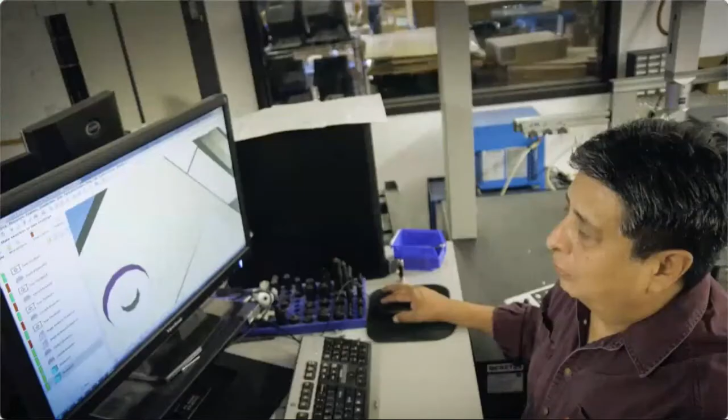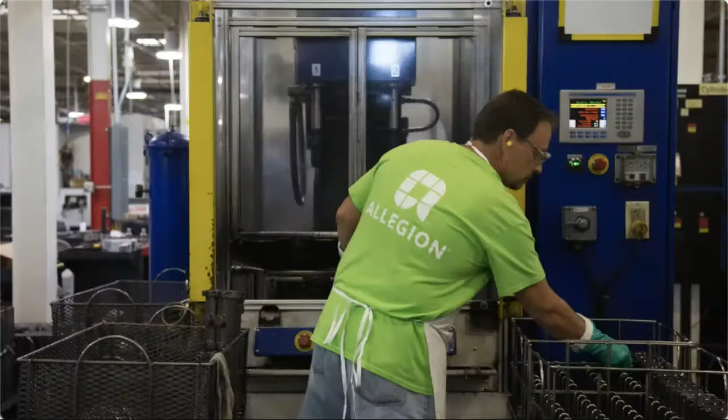At Allegion, we believe manufacturing is both a vibrant and essential industry. With many new trends impacting what we do every day, from robotics to the Internet of Things and more, there's no doubt that the creators of tomorrow have important roles to fill in pioneering safety and security at Allegion, both now and in the future. Guided by a shared vision of seamless access and a safer world, our employees are innovators, building products and solutions that create peace of mind.

As a global manufacturer with more than 30 brands in our portfolio, we invest in tools, technology, and our employees. Because of this, we have a healthy U.S. presence where those employees build mechanical and electronic locks, emergency exit devices, door closers, steel frames, and many other security solutions that help keep people safe at work, at home, in our community, and on the move. Let's take a look at some of our essential facilities and incredible jobs.

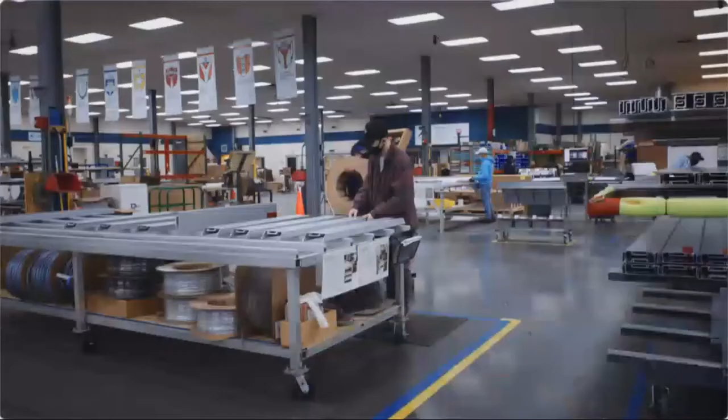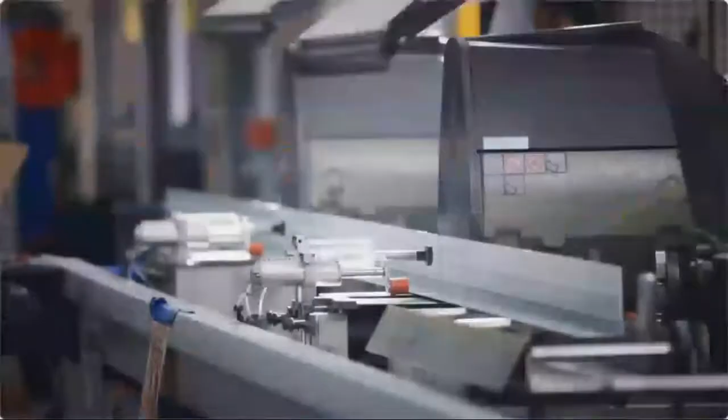Near Seattle, in Everett, Washington, Allegion's AD Systems solutions are produced in a 50,000 square foot facility. Since 2009, AD Systems has manufactured high-quality door systems for customers across healthcare, hospitality, commercial office, and education environments. Through a strong commitment to innovation and positive relationships with architects and designers, our experts in Everett quickly respond to the requests for custom work, ultimately building sliding doors and interior storefront assemblies for projects throughout the United States and abroad that can meet a variety of aesthetic, privacy, and safety needs.

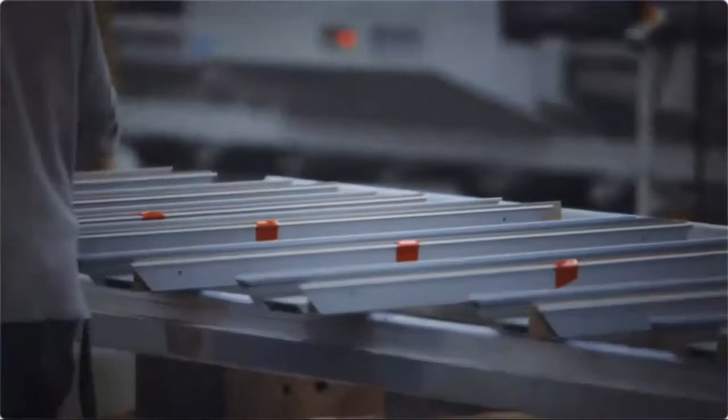In fact, our AD Systems employees manufacture doors that can meet the strict health requirements of clinics and medical offices, as well as offer the energy-efficient and touch-free automated accessibility of the future.

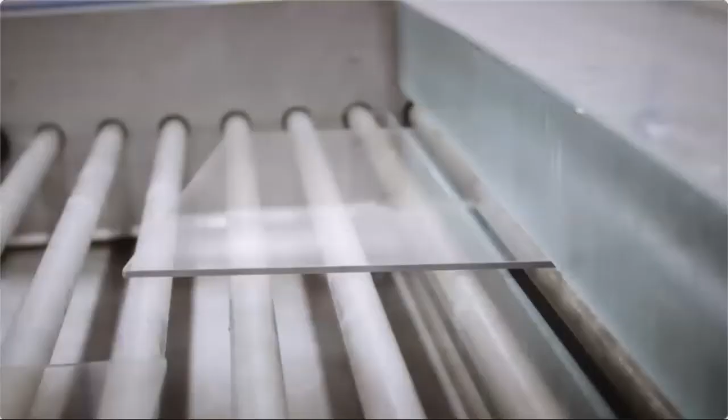In Snoqualmie, Washington, also located near Seattle, Allegion produces Technical Glass Products, or TGP, solutions. Since 1980, TGP has been supplying specialized glazing materials and systems for commercial and institutional buildings around the world. The brand is committed to helping solve challenges faced by architects, general contractors, and glaziers through its services and two product lines: fire-rated glass and framing, and specialty architectural glazing. You'll find these solutions at airports, schools, libraries, hospitals, and museums, among other places.

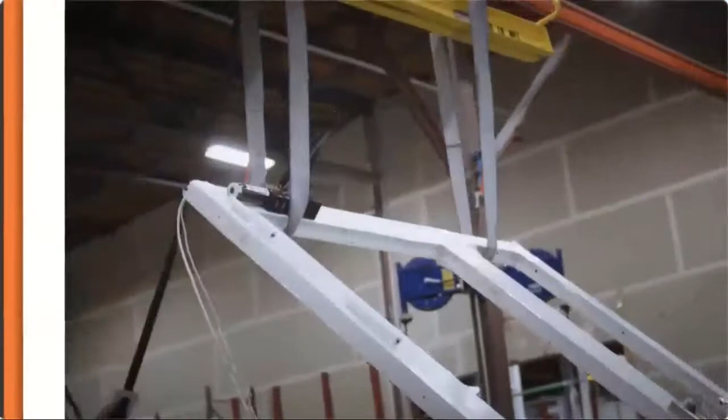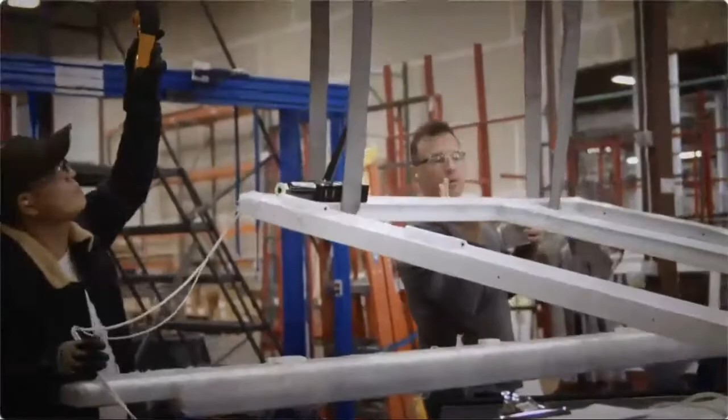TGP has exclusive agency relationships with Nippon Electric Glass, NEG, Pilkington, and RP Technik to distribute certain glass and framing product lines in North America and the Middle East. Our jobs in Snoqualmie range from assembly, with roles in fabrication, welding, and powder coating, to engineering, sales, and more.

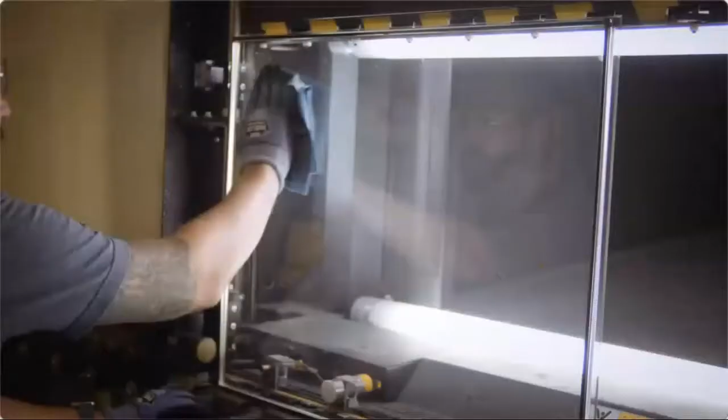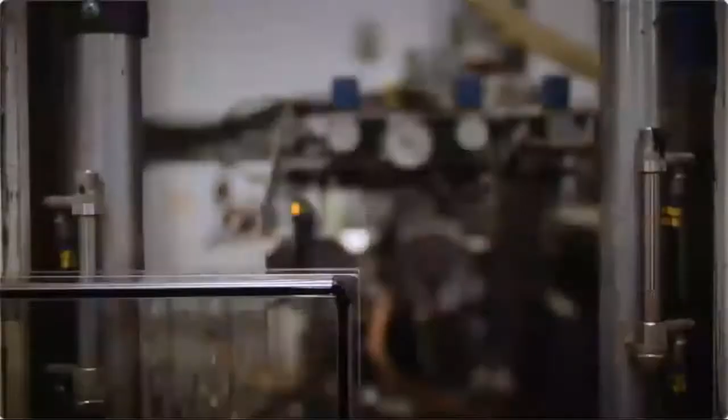TGP solutions are additionally manufactured in Perrysburg, Ohio, where our talented experts cut and package fire-rated glass to be paired with frames built in Snoqualmie or sold separately as loose glass for other customized applications. There, our state-of-the-art facility boasts nearly 70,000 square feet of manufacturing space, with opportunities to operate robotic equipment, as well as automated machines that, on average, process sheets of glass that weigh more than 800 pounds.

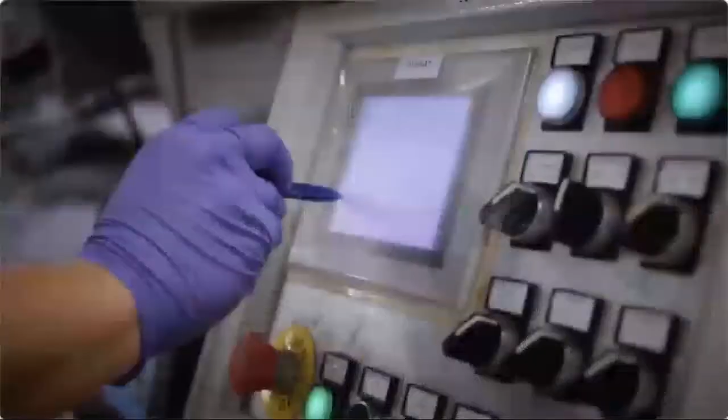The Perrysburg facility has two main product lines: Pyrostop glass and FireLite glass, and the local team averages cutting more than 6,000 pieces of glass per month.

Our Steelcraft brand boasts 2 manufacturing locations, a West Coast service and manufacturing center just east of Los Angeles in Chino, California, where we assemble and produce custom hollow metal doors and frames, and our main plant in Blue Ash, Ohio, near Cincinnati. While we proudly produce high-quality steel doors and frames at both facilities, our long-standing manufacturing history is rooted in Blue Ash.

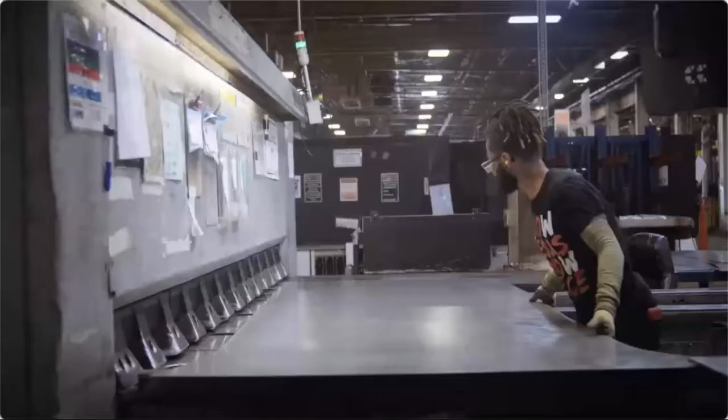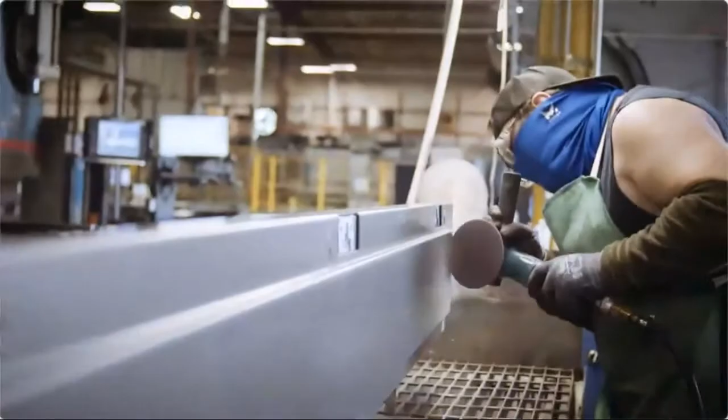Located there for more than 75 years, a visit to our operations showcases talented employees with expertise in materials handling, welding, laser operating, and fabrication, creating doors intended to withstand fires as well as tornado and hurricane winds. Our production process starts with order entry, configuration, scheduling, and programming, and then moves to manufacturing our doors and frames from beginning to end, with finish on the paint line before shipping.

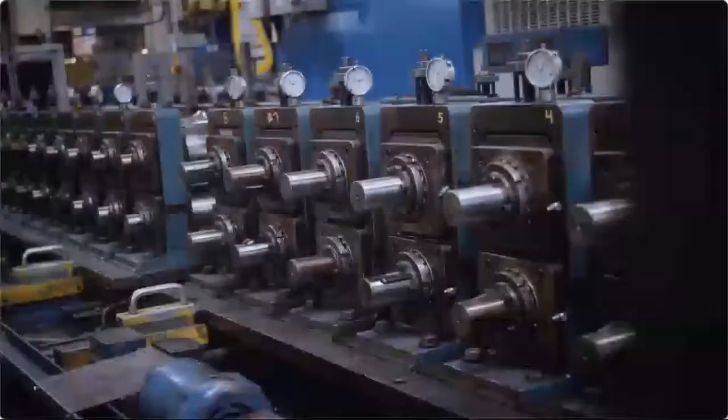From there, they go everywhere. You'll find these doors and frames around the world too, at medical centers, schools, and commercial offices. Some of our solutions can be seen in popular gathering places too, like the Superdome in New Orleans, the State Convention Center in Washington, and Iowa State's Sports Performance Center. You'll find our products at Ohio University, the University of Michigan, and the University of Kansas too.

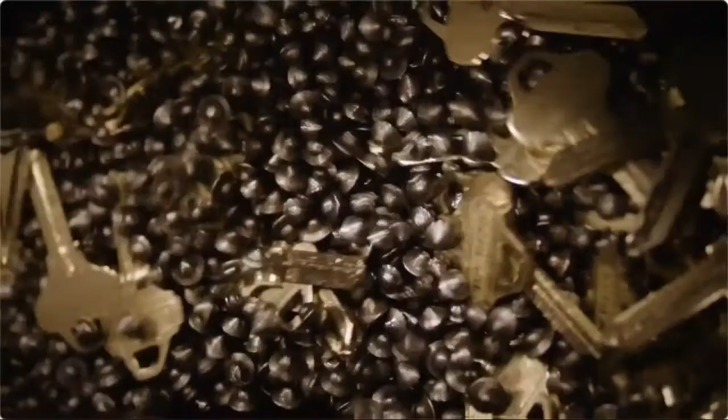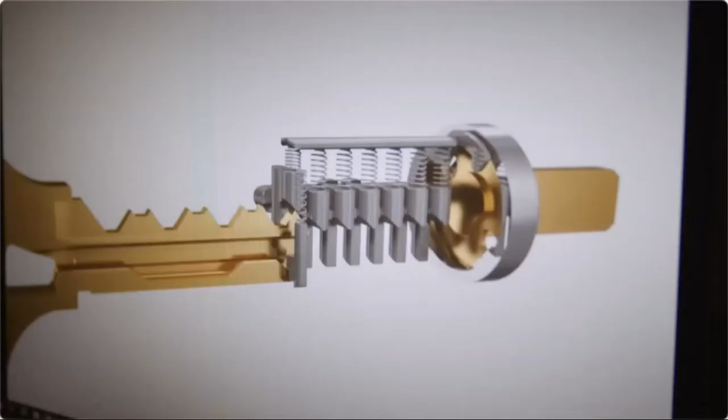In Security, Colorado, close to Colorado Springs, we produce keys, lock cylinders, and mechanical locks, as well as high-security credentials and biometric products, all for commercial buildings. We've operated there for more than 40 years, and our talented employees process over 100,000 parts per day and configure and test a wide array of high-security products that are distributed to customers across the globe. The site is comprised of critical roles that include engineering, fabrication, assembly, testing, distribution, and supply chain management. Our associates use innovative tools like 3D printing, high-speed precision machining, and computer-aided design programs.

We're especially proud to manufacture the Schlage brand of security solutions that provide seamless access at office buildings, universities, medical centers, and other vital places through mobile credentials.

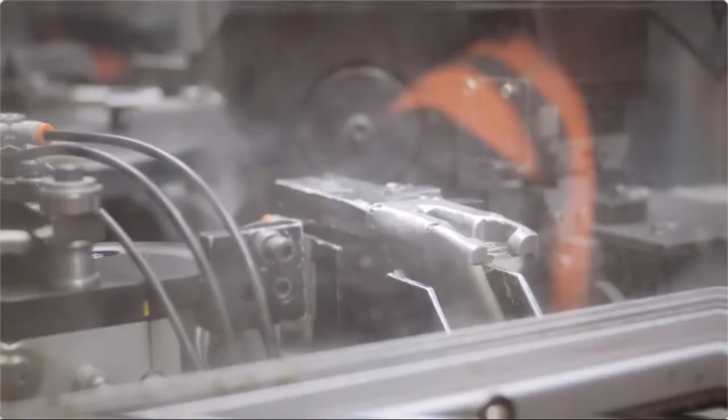Our Olathe operations has produced mechanical lock cylinders and keys for more than 40 years in the Johnson County area. Located just outside of Kansas City, our facility includes a nearly 300,000 square foot warehouse and employees who also work in distribution, customer care, and sales. In fact, any Schlage residential lock that you see at your local hardware store, like Lowe's or Home Depot, has been supplied through our Olathe operations.

That means if you live in the United States and have a Schlage door lock on your home, it passed through our facility here. We fulfill approximately 300 orders per day and ship nearly $1 million worth of product daily from this facility. With core competencies in assembly as well as shipping and receiving, there are many incredible opportunities to play a role in delivering Allegion's vision of seamless access and a safer world.

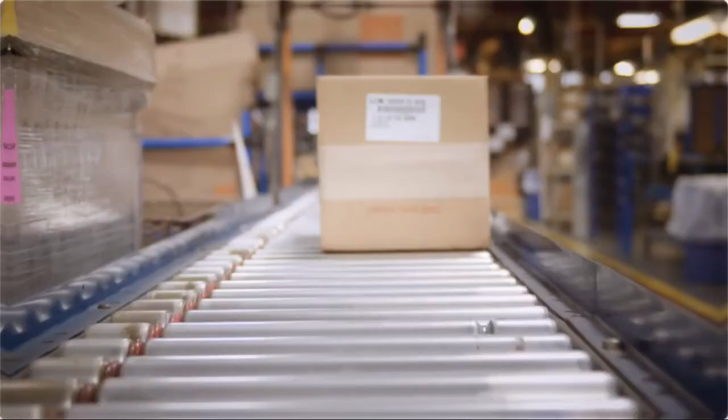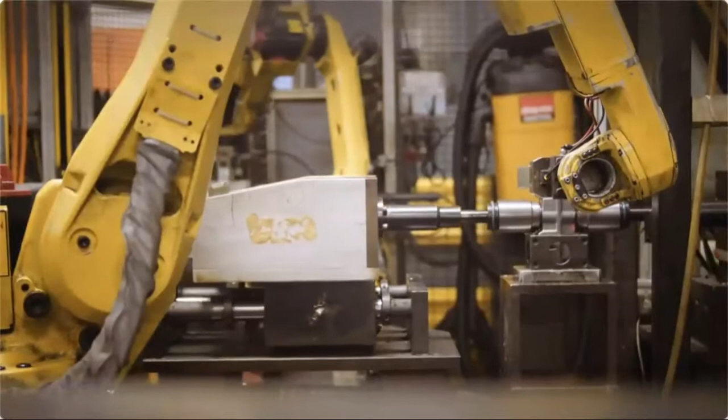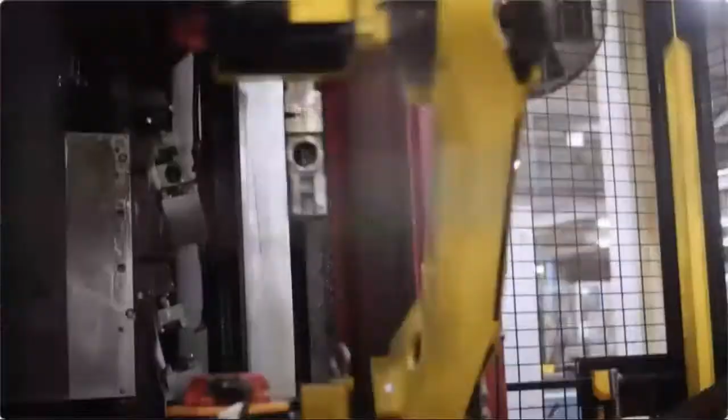Allegion also has a strong legacy in Illinois, where we have manufactured LCN door closers at our Princeton facility on Railroad Avenue for more than 70 years. Here we've invested in state-of-the-art equipment, from CNC machines that can be programmed to run multiple processes for manufacturing multiple product lines at the same time, to cobots that work next to our people in an assembly line, driving extra flexibility and efficiency. Using this equipment requires problem solving and troubleshooting, programming, digitization, and automation skills.

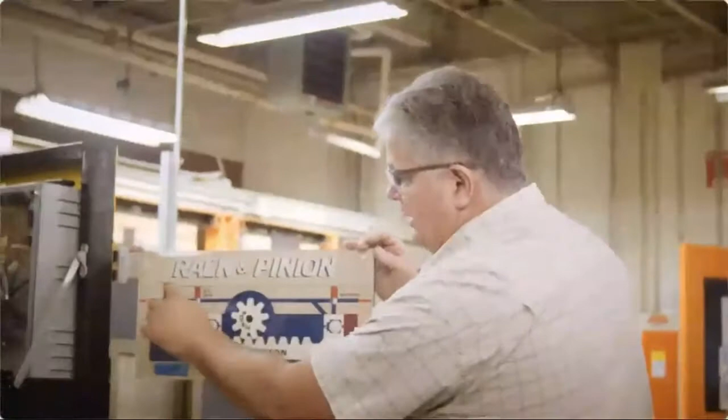You'll also find lab technicians that specialize in product testing, tool makers, and maintenance teams, all of whom play a vital role in taking our security solutions from start to finish. LCN products can be found in many high-traffic facilities such as schools, hospitals, government and correctional buildings around the world. Our creators produce 35 different series of closers and door hardware to choose from, products that have 15 to 20 years of operating life.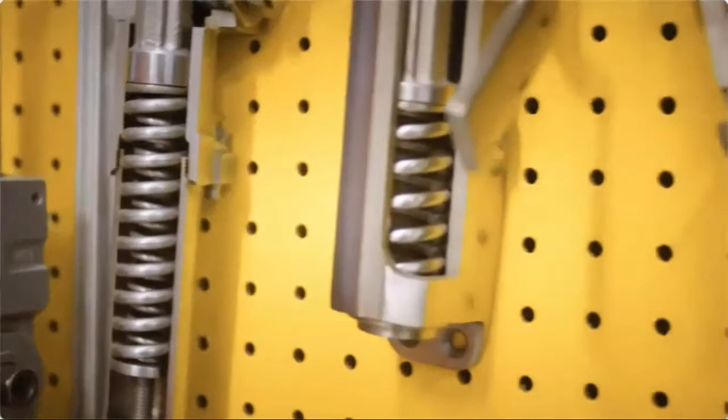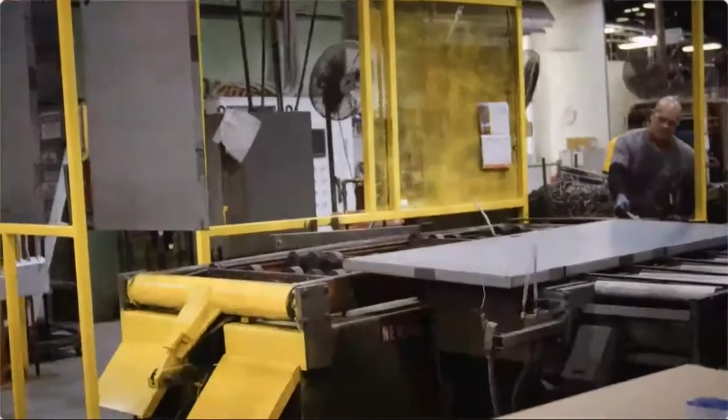Our Republic brand proudly operates in McKenzie, Tennessee, sitting in the northwest region of the state at the tri-point of Carroll, Henry, and Weakley counties. We've built high-quality hollow metal doors and frames there for more than 40 years, and today our talented creators produce 300,000 frames and 80,000 doors annually.

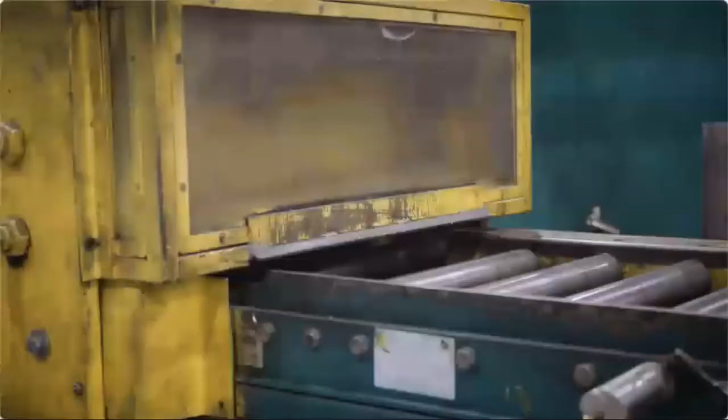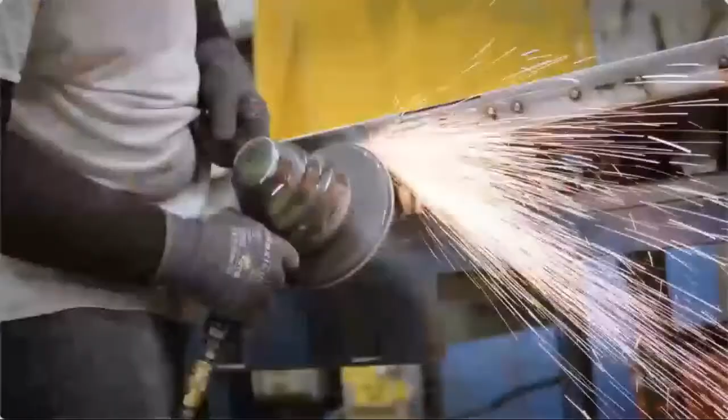You'll see our solutions everywhere from national museums in Washington, D.C. to corporate data centers on the West Coast. Our people specialize in customizing products to meet customers' exact needs. For instance, our talented employees grind down metal to prepare for a seamless door edge application, many times required for schools, hospitals, and commercial kitchens. And while our employees focus on customer needs, they've also innovated many of the ways we work to improve safety, ergonomics, quality, and efficiency.

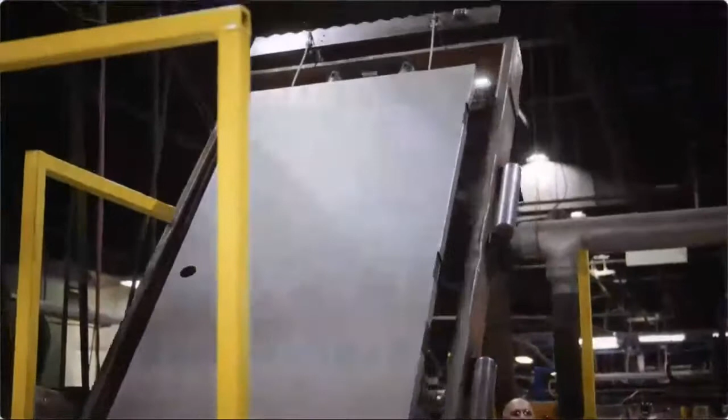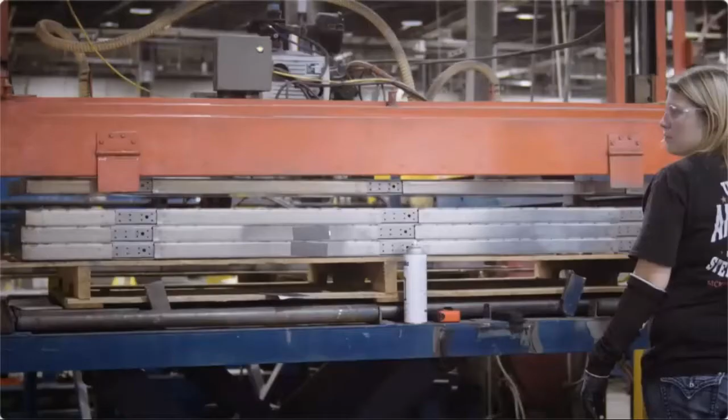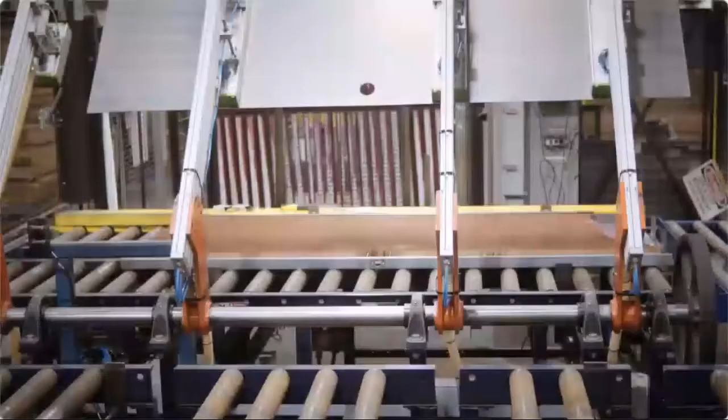Because of that, you'll see automated processes and conveyors in McKenzie that transfer our doors and frames through different phases of production. But our people make the difference, running control stations, cutting and forming systems, paint lines, and commercial drying ovens, among other important equipment. And because we work with steel, precision welding drives our solutions to be strong and durable for years of continuous service.

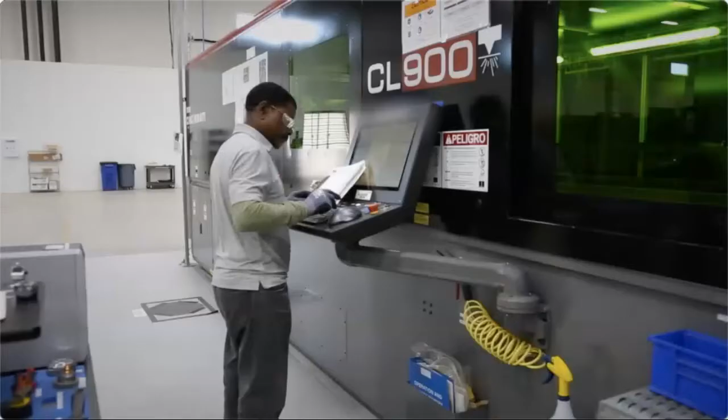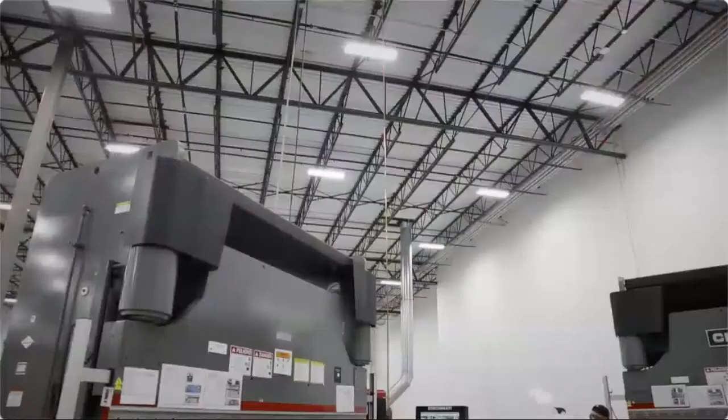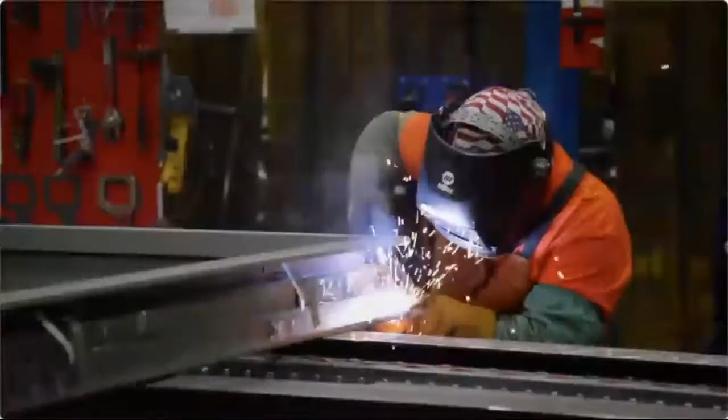Yet another Allegion facility, located in Irving, Texas, features state-of-the-art custom manufacturing for our Republic hollow metal doors and frames. There, our experts use laser technology to make high-precision cuts of metal sheets that provide speed and flexibility, as well as minimal waste and greater efficiency for projects. Our operators additionally use brake presses to safely and accurately form frames, welding stations to match specific order requirements, and paint stations to put on the finishing touches.

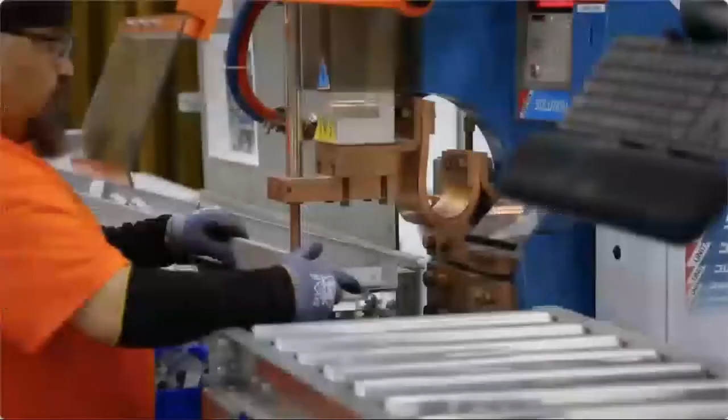Unique skills utilized throughout these production processes highlight the level of talent our experts possess, and that are needed in today's modern world of manufacturing.

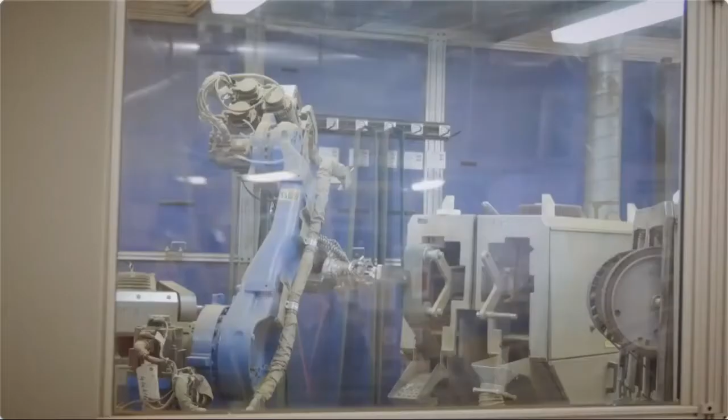Rounding out our U.S. manufacturing footprint, we have two production facilities in Indianapolis, Indiana, located right down the street from each other, operating on Tobey Drive for more than 30 years and in the state for more than 100 years.

We build Von Duprin and Falcon exit devices, as well as Glynn Johnson, Ives, and Zero International door hardware there. We're known for inventing the emergency exit device, as well as all of the customization we can provide for those life-saving devices today, which you'll see in nearly every public building, be it a government facility, a grocery store, a restaurant, a movie theater, a place of worship, a university, or otherwise.

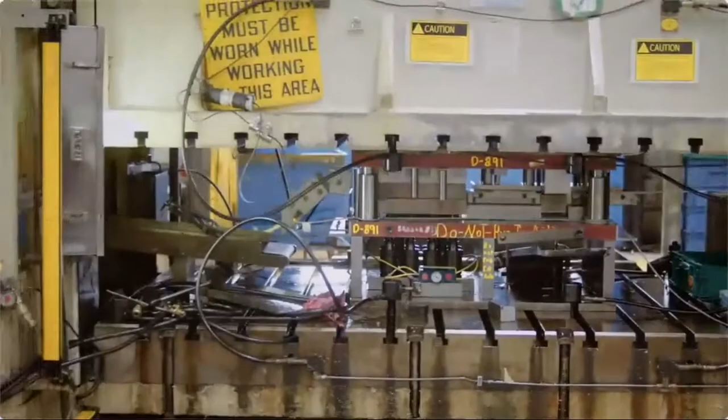In fact, we produce more than 100,000 unique configurations in an average year. On any given day, we fulfill around 700 orders, requiring a cross-trained and flexible workforce with competencies in stamping, CNC machining, powder coating, plating, laser cutting, and etching.

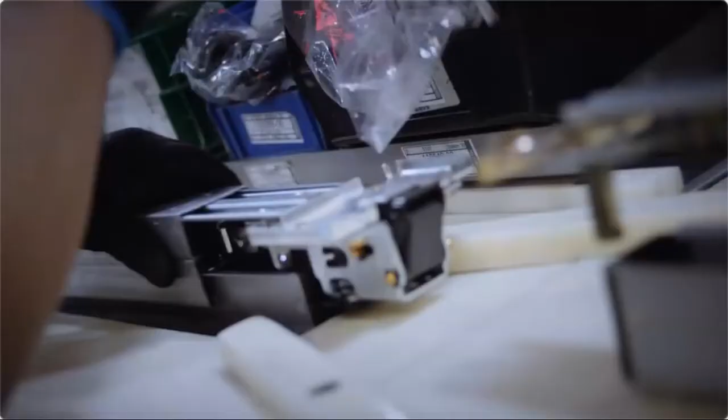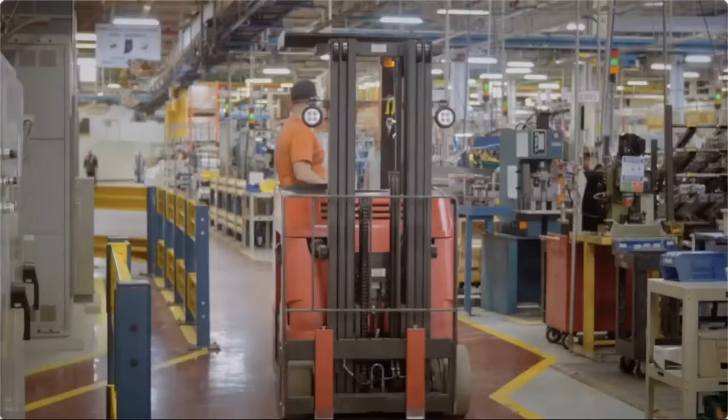Our main line has a state-of-the-art vision system with 3D work instructions. It's so sophisticated that it detects errors and stops the line if a device is not built exactly as ordered. Our people play a critical role, through problem solving, in keeping our customers safe whenever and wherever our solutions are used. There's no doubt that Allegion employees are innovators, creating new and better ways to keep people safe.

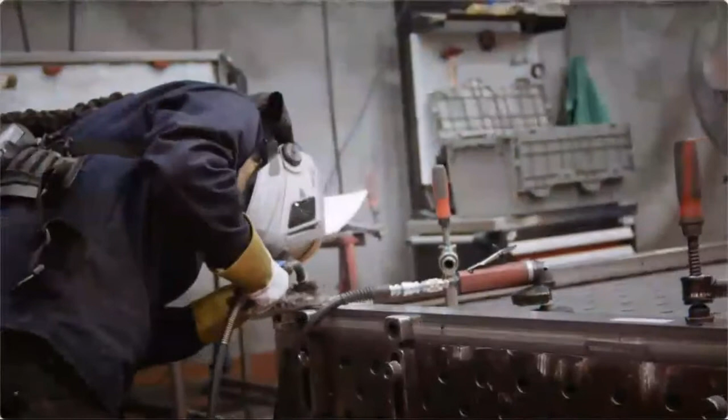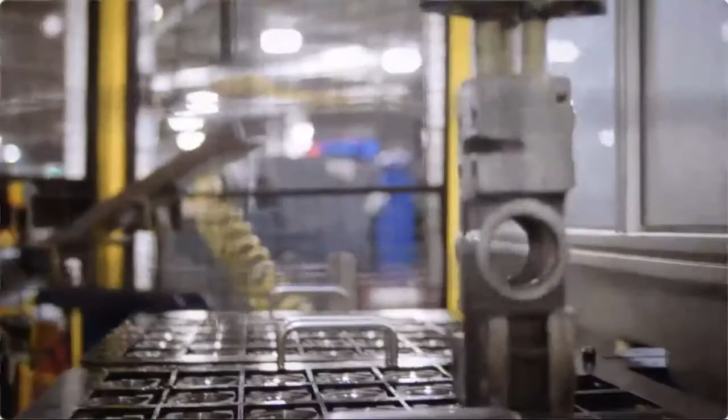The manufacturing jobs found at our U.S. and global sites today are centered on employee empowerment, engagement, and problem solving. From assembly, engineering, IT, materials management, distribution and logistics, robotics, environmental, health and safety, tool making, and more, the career paths are vibrant and valuable at Allegion, and our work has never been more important.

Welcome. We are so excited to have you with us for our 2021 Virtual Manufacturing Day. My name is Chris Dybeck. I am the plant manager at the Allegion facility in Princeton. Each year we hold this event in October to celebrate the amazing opportunities in manufacturing, and we hope to inspire some of you to pursue a career in this great industry.

There are many vibrant and valuable jobs. Manufacturing, as we've definitely seen throughout this global pandemic, is essential. Think about it: if something isn't grown, it's made. And at Allegion, our work matters. Allegion has continued operating throughout the COVID-19 pandemic to continue producing our essential products, which provide safety and security at medical centers and hospitals, among many other places.

Of course, our event this year is virtual to help protect your health and safety, as well as the health and safety of our 300 local people. As a business that's been located here for more than 70 years, health and safety is our top priority.

At Allegion, we invest in our employees and our facilities. If you were in person with us for a tour today, you'd see many updates to help protect our people, like physical barriers, temp screenings, self-assessments, and mask use. And even though you aren't here in person, we're going to spend our time together today showing you everything we can about who we are and what manufacturing careers look like.

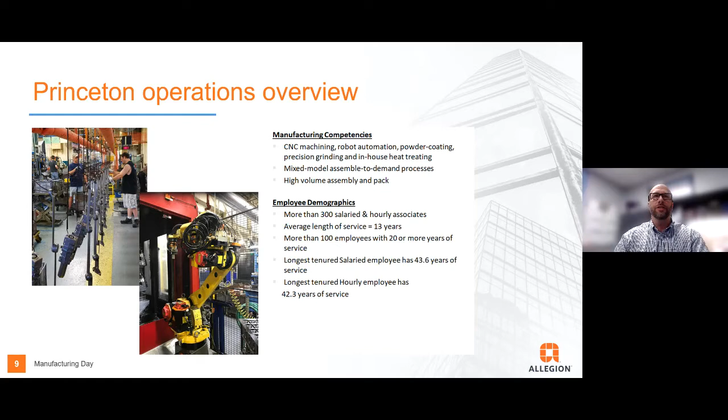Manufacturers have lifted us from the destruction and disarray of wars and the despair and distress of economic recessions throughout U.S. history. Now with COVID-19, manufacturers have mobilized to meet the greatest public health and economic threat of our time. An example, Allegion producing door controls for a new COVID-19 testing center, or another where GM began producing ventilators.

Throughout the pandemic, Allegion led with an immediate focus on the safety and health of our people, our customers, and our communities. Leveraging our Be Safe, Be Healthy value as our long-standing true north, we kept our essential employees working and took extra precautions to help keep them safe, whether they were at our site or remote locations.

Manufacturing jobs today are safer than ever because of new ideas and technology. In 2020, we saw a 9% year-over-year reduction in total recordable incident rates, 29% year-over-year improvement in lost time injury rate, and our value and investments have driven us to have an incident rate that is 88% below the reported 2019 U.S. industry average.

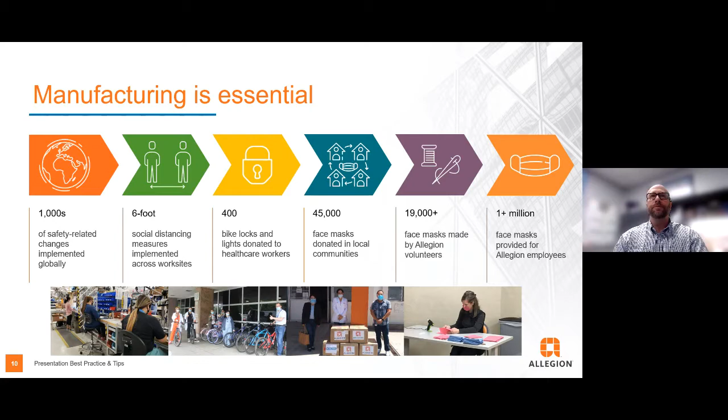Manufacturing, as you can see from just Allegion's local impact, is very important to the U.S. economy. Still, manufacturing, specifically in the U.S., is at a crossroads. We're facing a skills gap. 80% of manufacturers report that there's a shortage of qualified applicants for open positions. Manufacturers reported that finding the right talent is now 36% harder than it was in 2018, even though the unemployment rate has nearly doubled the supply of available workers.

It's easy to point to the stereotypes of manufacturing sweatshops portrayed by Hollywood and television features in recent years as generating a sense of perceived negativity that has not been overcome by the manufacturing industry. But it's more than that. Stories and firsthand accounts have been passed through families regarding less than desirable conditions of factory work, ranging from long hours to repetitive, mindless contributions.

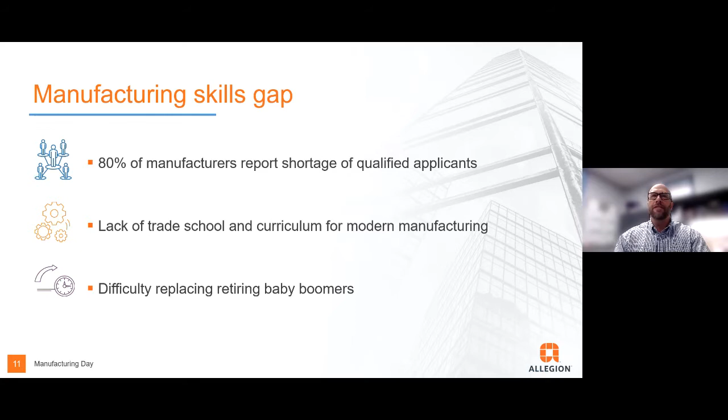The manufacturing skills gap is also linked to the lack of STEM, or science, technology, engineering, and mathematics skills among the workers, and fueled by a decline of technical education programs in high schools, as well as a lack of interest in the manufacturing industry by today's youth. Due to the skills gap, it's now expected there could be as many as 2.1 million unfilled positions in manufacturing over the next decade.

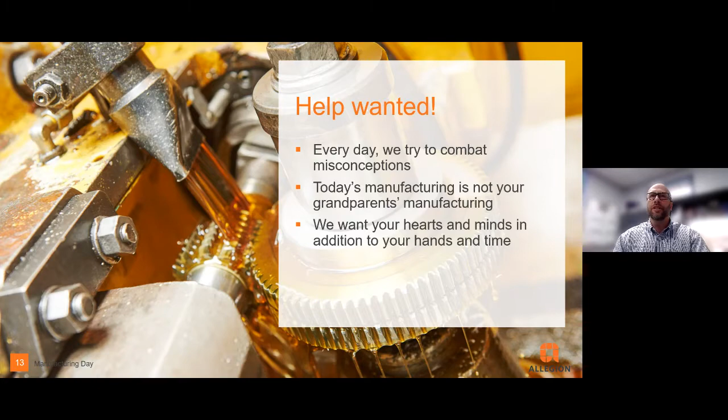At Allegion, manufacturing jobs are centered on employee engagement, empowerment, and innovation. We want your hearts and minds in addition to your hands and time. Allegion believes tools and technological investments are essential elements of being able to provide customers with shorter delivery cycle times and higher quality.

Today, many new technologies and trends are impacting manufacturing, like robotics, the Internet of Things, and artificial intelligence. More than 12.3 million people are employed in manufacturing in the US today. These millions of people are conceiving life-changing ideas, making a difference and improving the lives of others through manufacturing. Equity, inclusion, and diversity initiatives are having a positive influence at manufacturers, including Allegion.

Manufacturing drives growth in our economy. Every $1 spent in manufacturing generates an additional

$2.74 of value in other sectors. About 1.4 million U.S. manufacturing jobs were lost during the early days of the pandemic, according to a study by the National Association of Manufacturers, setting back the manufacturing labor force by more than a decade. However, the industry has largely recovered those lost jobs and is now urgently seeking more workers.

There are incredible jobs in manufacturing in a variety of expertise, from production and distribution to engineering and environmental health and safety. Locally, Allegion employs 300 people in manufacturing. If you talk to our employees, many of them have worked in a number of roles during their careers and developed a variety of skills.

You'll hear some of those experiences in a panel discussion later today. And I believe there can be a bright future for manufacturing as we will continue to see the introduction of new technologies. Tools and investments are essential elements of being able to provide our customers with shorter delivery cycle times and higher quality. It is imperative to have employees who have the desire, knowledge, expertise, and capability to run, manage, and maintain such investments.